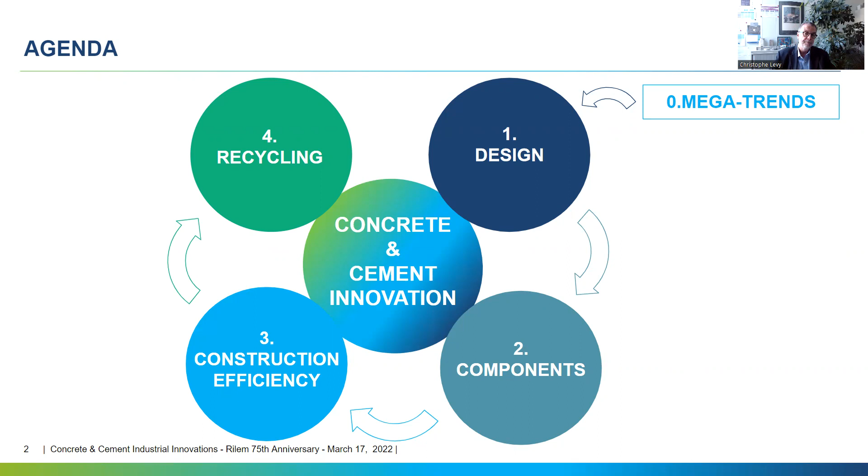The main worldwide mega trends impacting the construction materials industry are the following. The global population is dramatically rising from 7.8 billion today to 10 billion by 2050, and becoming more and more urban, from half of the people living in cities today to two thirds by 2050.

We need a strong shift to circular economy. We are obviously in a race for climate, and about 1 in 7 human beings has no access to decent housing, which is absolutely unacceptable.

These megatrends are fueling the recent innovation avenues like low carbon, energy efficiency, modularity, circularity, renovation, affordability, but also durability, aesthetics, and digitization.

Now, what is an industrial innovation? For me, it's an invention sold significantly or very promisingly in the near future and in different markets.

Let's look at the most innovative fields. Firstly, architectural, structural, and environmental design. For components, we will speak about cementitious materials, admixtures, and reinforcement.

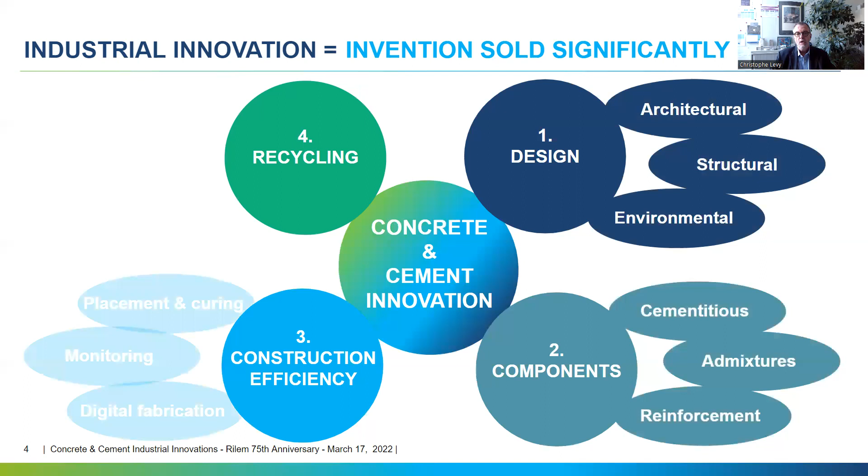Regarding construction efficiency, we will present innovations about digital fabrication, monitoring, and curing. And finally, recycling with alternative fuels and raw materials in cement plants, CO2 recycling, and recycled aggregates.

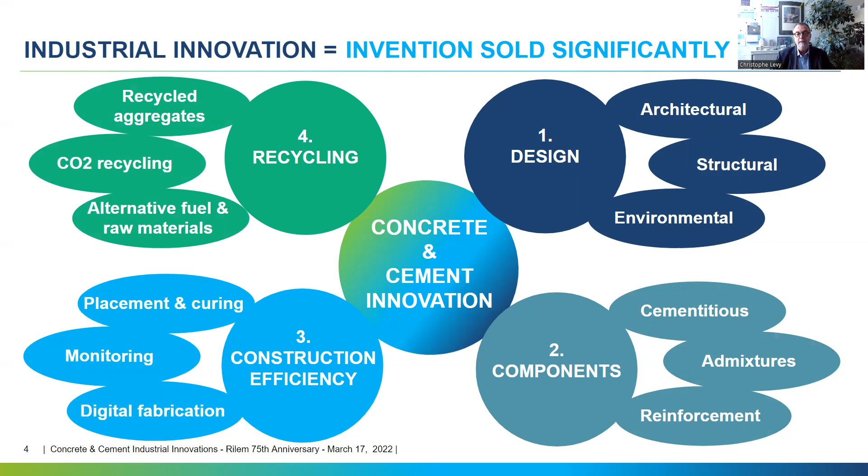And now, let's have a quick look at the 17 concrete and cement industrial innovations I have chosen. Let's start with the field of design.

Regarding architectural design, ultra-high performance concrete is today synonymous with optimum strength, ductility, durability, and absolute beauty when speaking about building facades, lattices, and envelopes. Here are some beautiful and recent examples coming from Serbia, USA, and France.

Photoconcrete is another amazing aesthetic concrete innovation for beautiful facades and walls. A specially developed surface retarder is printed onto a film or paper, replicating the original image. This retarder prevents the hardening of the surface of the concrete, which can then be washed or brushed away.

A last example of aesthetic innovation, which did not exist 3 decades ago, and which allows us to improve the image of concrete, is photoluminescent concrete. Allowing energy savings, this new technology uses synthetic aggregates which re-emit different colored lights at night.

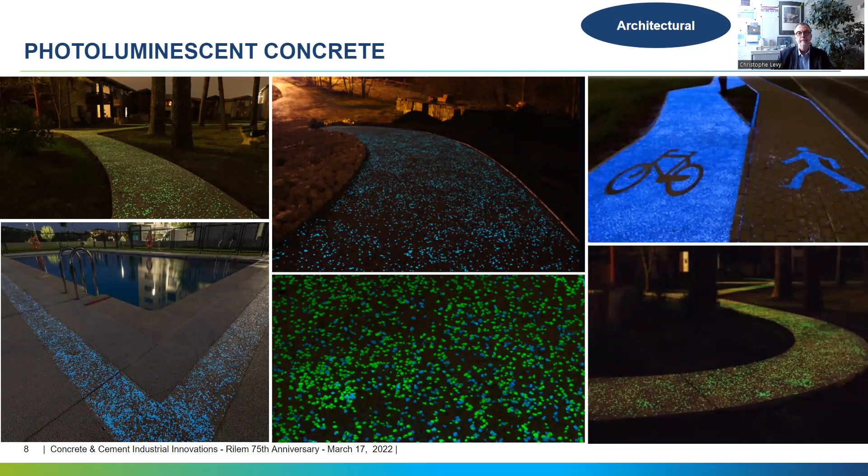If we now move to structural design, a key innovation is the recent development and deployment of low-carbon building systems. On one side, new design tools and concepts allow today to reach important material savings, like, for example, topology optimization, thin bridges on complex building shapes, funicular design, which means fully-in-compression structural design, and the ability of robotized construction to...

...deposit the right material exactly at the right place instead of pouring conventional rectangular shapes. On the other side, low carbon footprint concretes are more and more developed today, using less cement, more supplementary cementitious materials like slag, fly ash, fillers, calcined clays, construction demolition waste fines, and sometimes biosourced components.

Today, the extensive use of rigorous and independent environmental product declarations and of life cycle analysis bring credibility and buy-in to these new low CO2 concretes.

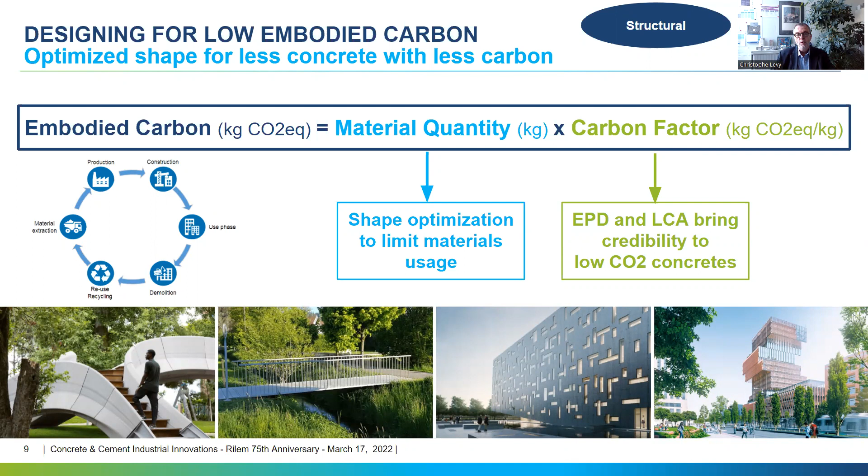Speaking about environmental design of a building, an important innovative product which was not available on the market 10 years ago is a cement-based insulation material, a kind of extremely light mineral foam with excellent insulating properties, fire resistant, low embodied carbon, no volatile organic compounds, no settlement, and recyclable.

This mineral foam is used in insulating concrete blocks, attics, and roofing.

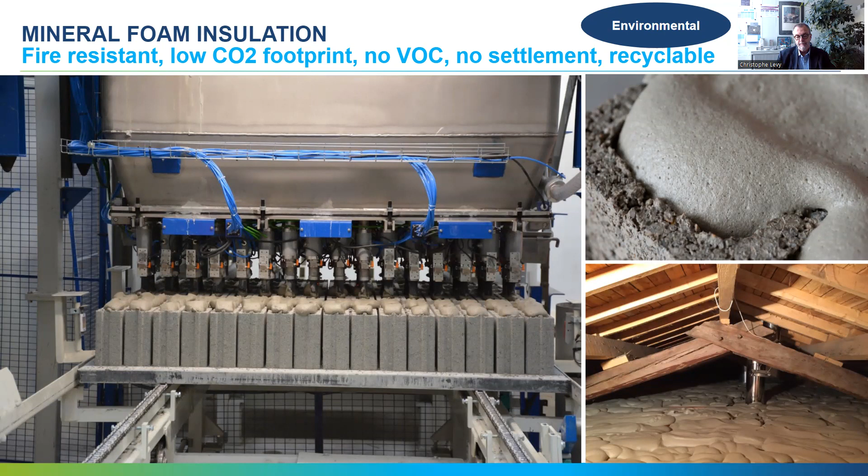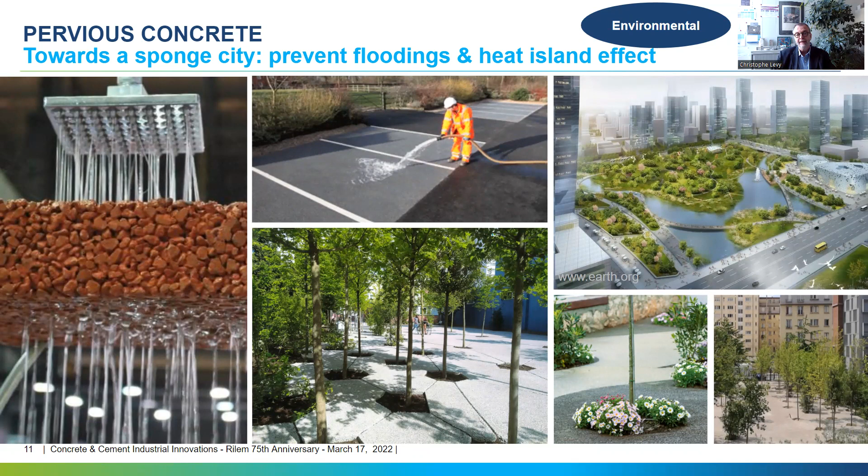Hardscaping is a huge issue in the urban environment and can contribute to flooding and heat island effect. New pervious concrete can help by reaching a drainage rate of 200 liters per minute per square meter while allowing traffic. The combination of vegetation and permeable surfaces increases shade and triggers an evapotranspiration phenomenon. This hinders the heat island effect and is known as sponge city.

As a last example of innovative environmental solution, new bioactive concrete solutions can help to re-establish damaged marine ecosystems and improve marine biodiversity restoration.

Thanks to its adequate pH, rugosity, and porosity, this type of concrete enables marine life to come back. For instance, accelerating the kinetics of algae growth by 4 times, or developing a high concentration of fauna with more than 60 species after only 3 years.

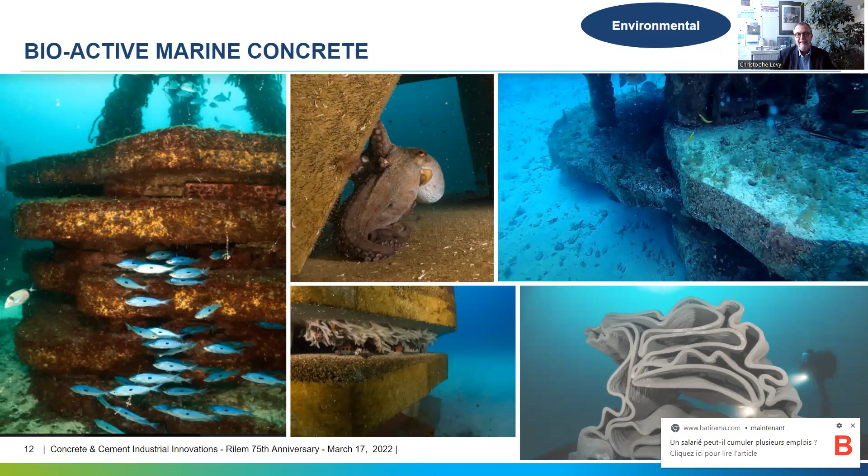Now we can switch to the field of concrete components. In order to reduce the carbon footprint of cement, considerable work is being carried out worldwide to develop new cement substitution products, such as calcined clays.

We need also to mention, as innovative SCMs which have recently been added in some commercial cements, the usage of construction demolition waste fines, or slags which are not GGBFS.

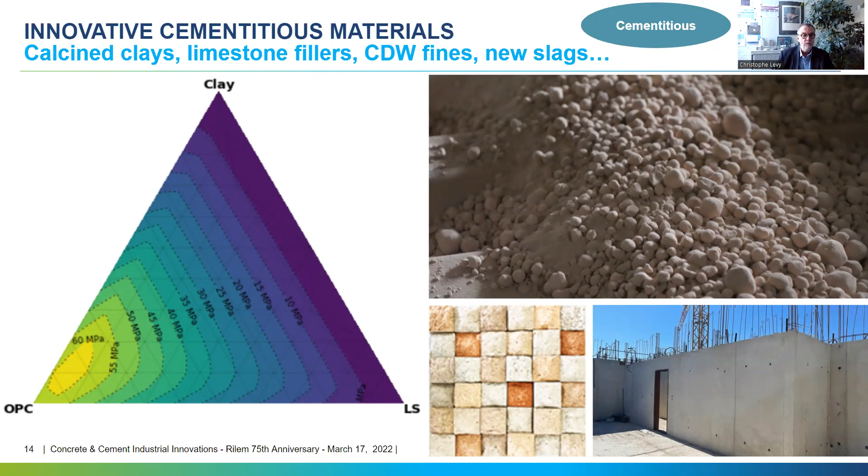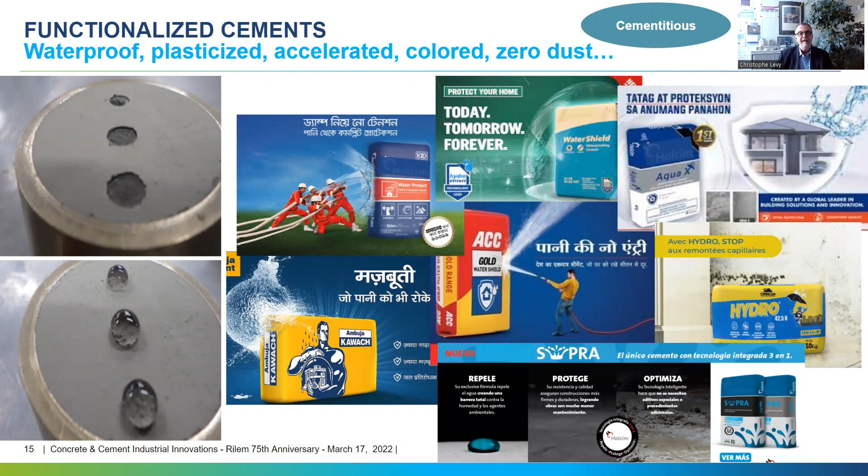Many functions are now added to the cement, like waterproofing, plasticizers, accelerators, fibers, color pigments, or even zero dust cement. As an example, the sales of waterproofing cement bags have been rocketing all over the planet.

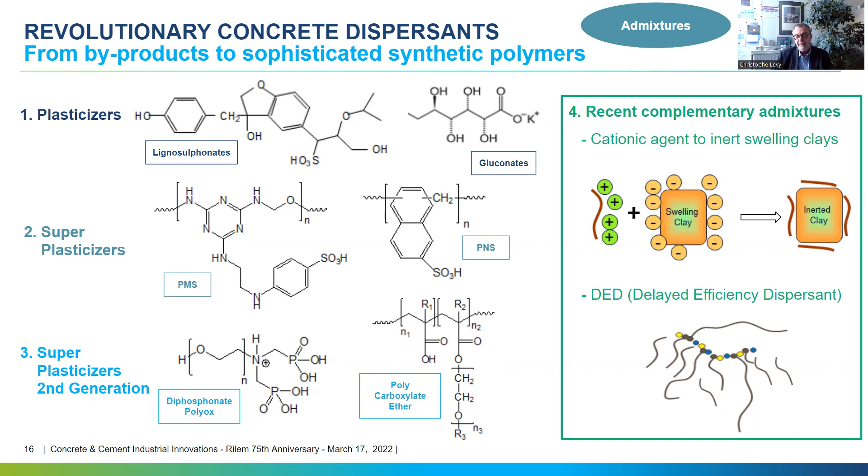Most of the significant innovative admixtures concern super plasticizers, even if new accelerators based on nano-sized CSH particles are interesting. From old-timer byproducts with retarding effects to much more sophisticated synthetic dispersing polymers like polycarboxylate ether, allowing the birth of many modern concretes. We must also mention recent innovative complementary admixtures like clay inerting agent, allowing the usage of clayish sand, and delayed efficiency dispersant, which dramatically improve concrete long workability when used with very high water reducer, PCE.

New concrete reinforcements are coming, like fibers, textile, and bars made of basalt, glass, or carbon. And they are very compatible with low CO2 concrete, having usually a lower pH. For instance, innovative carbon pre-stressed concrete panels are reinforced with thin pre-stressed carbon strands. These CPC panels are 4 times thinner with the same load-bearing capacity.

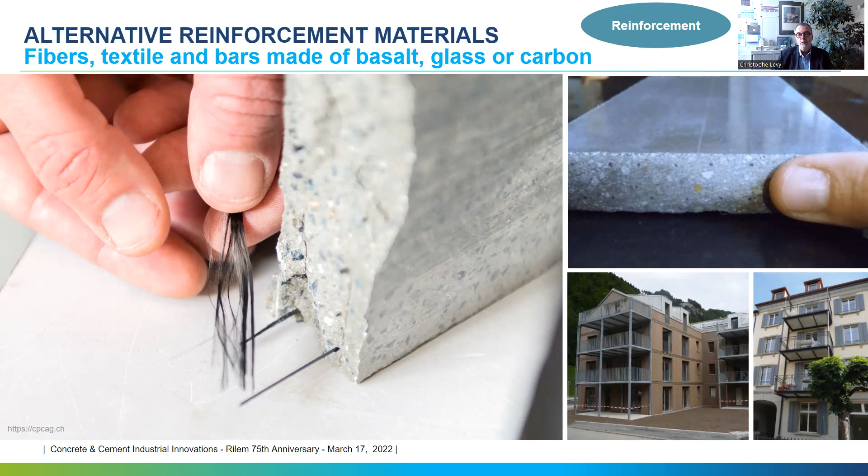Let's now have a look at construction job sites. Digital fabrication is probably one of the new concrete potential disruptors. Robotized placement can indeed simplify the life of contractors, especially for very specific complex shaped concrete elements like wind turbine towers or footbridges, to avoid very costly formworks.

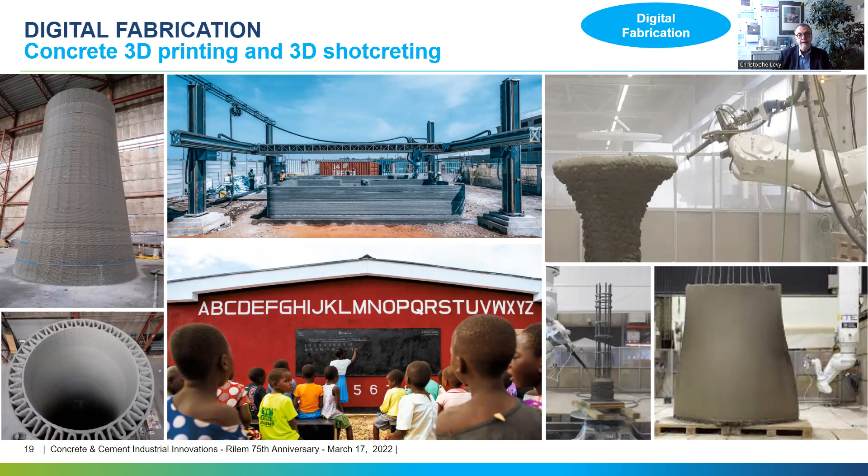Or, on the other side, for significant affordable houses on public buildings programs. But I think the future of 3D concrete printing will depend on our ability to develop lower carbon footprint inks, generalize the usage of concrete instead of today's enriched paste mortar, and improve and develop the 3D shotcreting approach, allowing easy to embed reinforcement. You can see it on the right.

Another innovation to improve construction efficiency is the entire concrete value chain getting increasingly digitized with sensors, artificial intelligence, and refined predictive models at all stages of its global life cycle. At the cement and concrete production level, sensors, probes, and image acquisition are more and more allowing full automation and predictive maintenance.

Customer digital services are a reality today with digital ordering, ticketing, and online information about concrete properties like air content, slump, temperature, but also maturity, strength evolution, corrosion, and cracking risks.

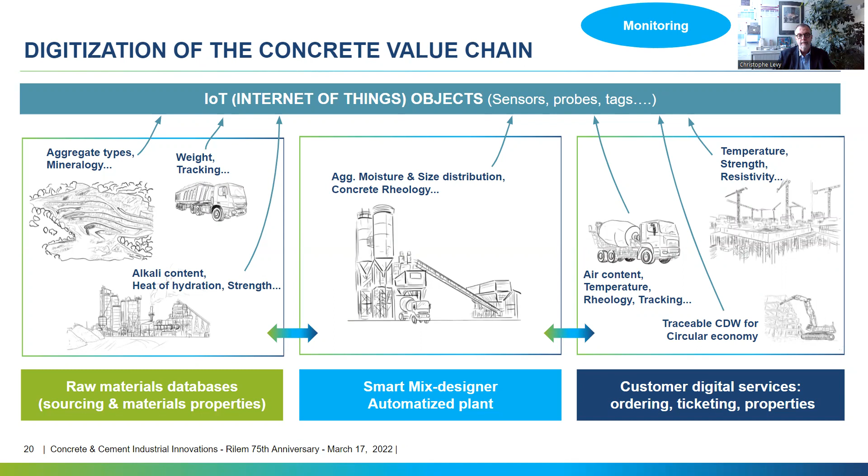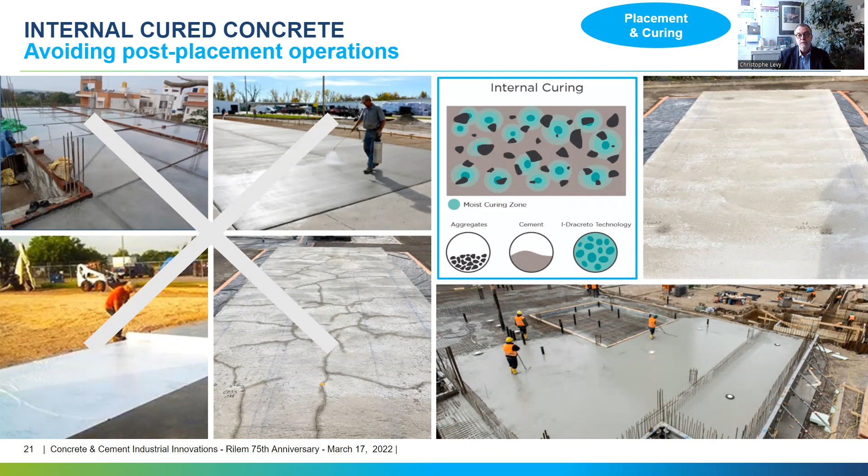Another important concrete innovation simplifying the life of construction job sites is internal cure concrete, using, for instance, the super absorbent polymer technology. Keep in mind, proper curing is sometimes overlooked on job sites. Internal curing is perfectly adequate to ensure the hydration of cement and to control early age shrinkage.

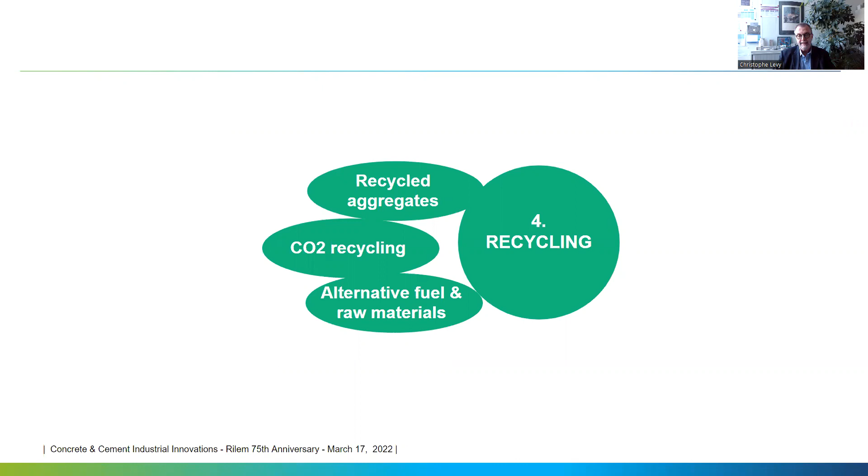Finally, we have reached the last field, I mean recycling. Today, we are able to produce clinker without the need of fossil energy, only with alternative fuel originating from industrial byproducts, bringing enough energy for clinkerization.

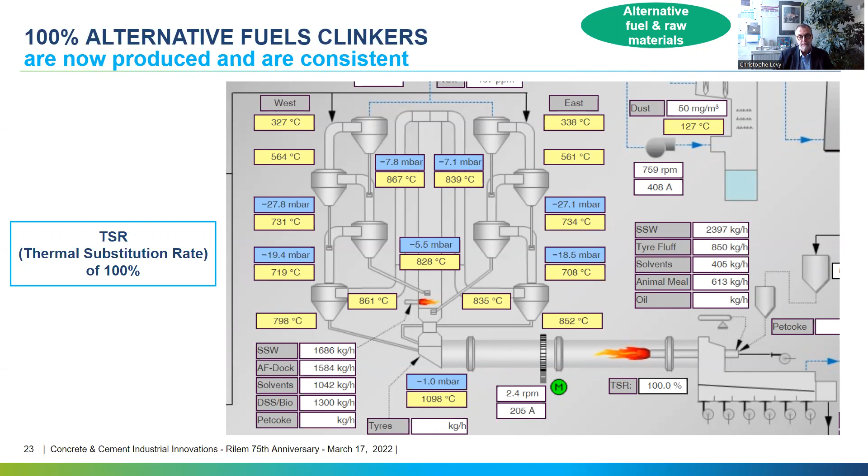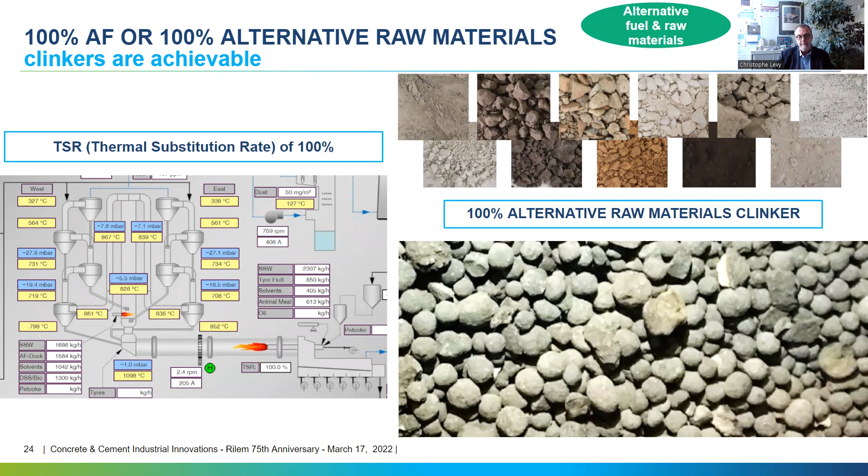But also using only alternative raw materials coming from various industries, which are providing the necessary sources of calcium, silica, alumina, and iron oxides. This is a potential revolution helping to limit the use of natural resources such as limestone and clay. The CO2 from the stacked flue gas of the cement plant can now be reused for mineralization, either to store it into recycled aggregates.

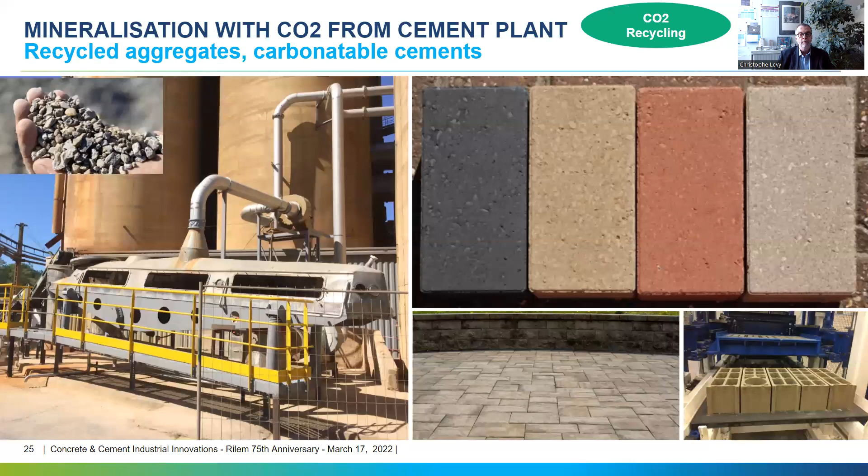This is a French national FastCarb project on the left, improving their quality by plugging the porosity and ultimately reducing the CO2 footprint of concrete, or to carbonatable cements such as gamma C2S or even OPC to produce low carbon precast pavers, blocks, or tiles.

1 to 5% of fresh ready-mix concrete is usually returned to the ready-mix plant. Instead of being discarded, see on the left side, it can be now transformed into a well-graded granular form that can be reused as aggregates by adding agglomerating powders or cellulosic fibers in the truck mixer.

On the right side, demolished concrete can today be processed and treated to supply rather good quality coarse and fine aggregates, and also fines which are reused in the cement production. These innovations allow us to dream about a fully recycled concrete in the near future.

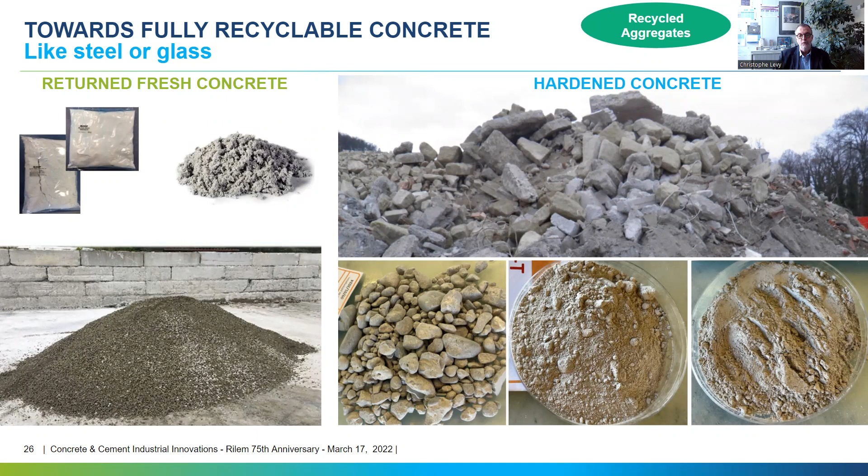After the 17 recent cement and concrete industrial innovations, let's try to imagine how cementitious materials could evolve over the next 3 decades.

Firstly, I really think concrete will remain the first used construction material, thanks to its versatility, resilience, beauty, recyclability, and local availability all over the planet.

Then I am sincerely convinced that in 2050, concrete will become a net zero carbon and fully circular material using almost no natural resources such as minerals and water.

The production of cement and concrete, its placement in more numerous precast plants or on job sites, will completely be automatized, robotized, and silent. Carbonatable concrete precast elements using stacked flue gas from cement plants will be very popular.

Concrete-based building systems will also dramatically evolve with solutions based on hybrid materials, multifunctional elements, dismantleable and reusable, and also with a build-more-with-less spirit.

Unfortunately, I am not sure I will be fit enough to personally check all these assumptions, but I am certain that the coming 3 decades of research and innovation in cementitious materials will be as fun and exciting as it has been during the past 3 decades.